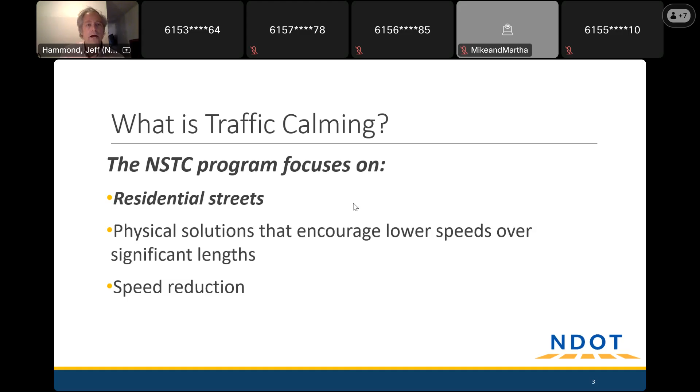Speed cushions are our number one tool. Probably most people are familiar with those, we'll talk more about those. Those are the types of things we use because we find them to be the most effective, and we are focused on speed reduction. We're not trying to shift traffic to one street or another, we're just trying to get it to stay where it is and slow down and drive more appropriately through your neighborhood.

We know that putting things on the road, the engineering side, is not the only way to go about this. Education is a big component, and enforcement is huge. We all wish, most people on these calls anyway, wish that we had more ability to have MNPD out, park a cruiser, and write tickets. That would be a big help to maybe curbing some of the speeding activity. Unfortunately, as you all probably know, there is a limitation for Metro Police Department to do that, so they're doing a lot of other important work out there.

So one of the reasons we do this program, and NDOT has put such an emphasis on slower speeds, is just because of the safety implications. This graphic speaks to that in the very unfortunate situation that there is a pedestrian-vehicle collision. We know that the chance of survivability is way up as speeds are slower. But that, along with just being a quality of life issue, we hear it practically every meeting. Neighbors say, I can't go for a walk along the street.

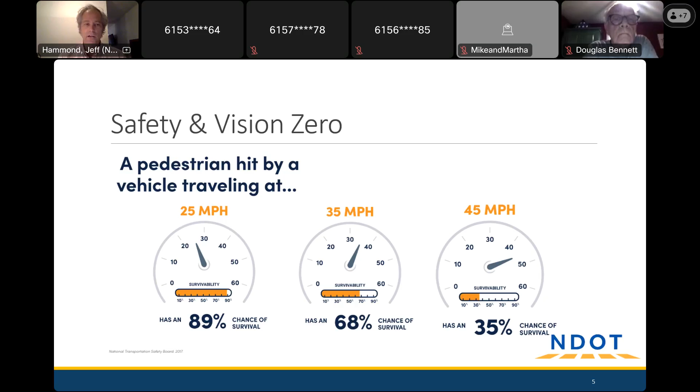I can't do a lot of things. I may not even feel comfortable going out to my mailbox and checking the mail because speeding can be such an issue at times. And so, that's why I think this program has been such a popular one.

This slide speaks to that. Right now in our program, we have over 600 streets just like Hicks that people have asked the city to look into the speeding situation. We open this application window up twice a year. You all applied into that. I'm not sure exactly when - in some cases these are a couple of years old - but neighbors on Hicks have applied into this program.

At that point, we go out and do a lot of data collection. I'll show you some of that. We pick the top 25 streets that have a demonstrated speeding issue, and Hicks, unfortunately or fortunately, is one of those. I mean, I guess if you feel like there is a speeding issue, then you're glad that we're here offering this project to you.

We like to share this just so that you know you're not the only ones experiencing these issues. This is a countywide situation. In practically every neighborhood in Nashville, there are people who complain about the speeding activity.

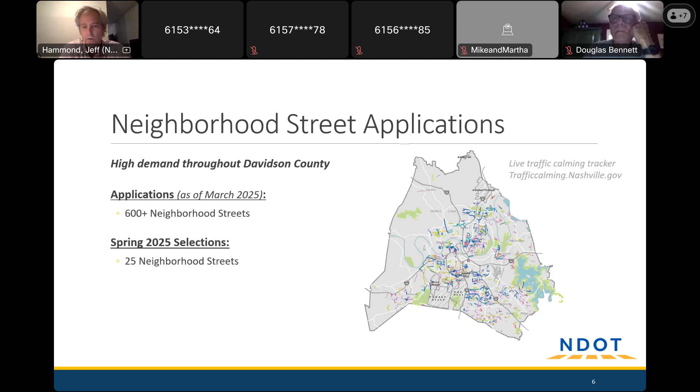At this point, we also like to remind you about Hub Nashville. If you're not familiar with it, it's a tremendous resource for those of us in Davidson County. You can call 311 and talk to someone, or you can go to hub.Nashville.gov. It's a great clearinghouse for all things metro government, not just NDOT or transportation, but practically every other department is represented there. We say that here because there are sometimes things that we cannot handle in the traffic calming program. A common request we get is for stop signs.

We don't do that as part of this program. Another common request we get is sidewalks, and if we just had sidewalks, the speeding might not feel as intense. Unfortunately, sidewalks are not part of our toolbox in this program either, but those are the types of things that you can go to Hub Nashville and put in that online request, and then a member of Metro staff will follow up with you on that.

of the scoring that we use are things that are probably pretty apparent - the amount of traffic on the road and the speed at which that traffic is driving. And then the other 30% have to do with more of those vulnerable users. Are there sidewalks on the street, for instance? Or is it on a transit route or close to it? And then are there things that someone may want to walk to? Are there libraries in the area, or a park, or a school? All of those types of things are taken into consideration when we pick which projects are going to move forward with a potential traffic calming solution.

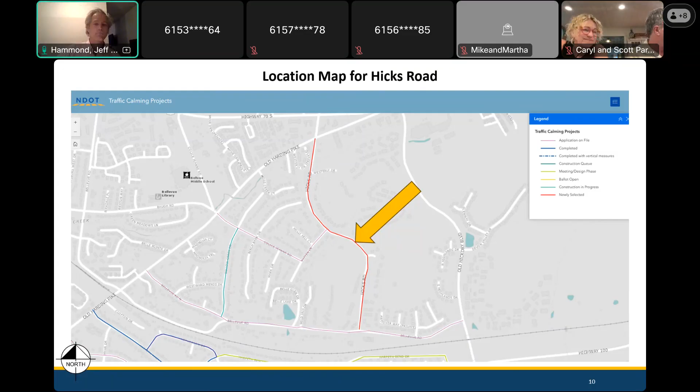Let's talk about some of the tools that we might think about. The first one we've already mentioned, the speed cushions. This is really the bread and butter of our program. It has become that way anyway, and I'm sure you all have encountered these on some of the streets around town. We've been using these now for about 5 years regularly, this style of speed cushion.

We might use 2, 3, or in some cases more speed cushions across the width of the road. The main idea is that we don't want anybody to be able to drive around them. Now, in your case on Hicks, I think 1 speed cushion in each lane is more than adequate. The edge condition is not such, in most cases, that someone's going to drive around.

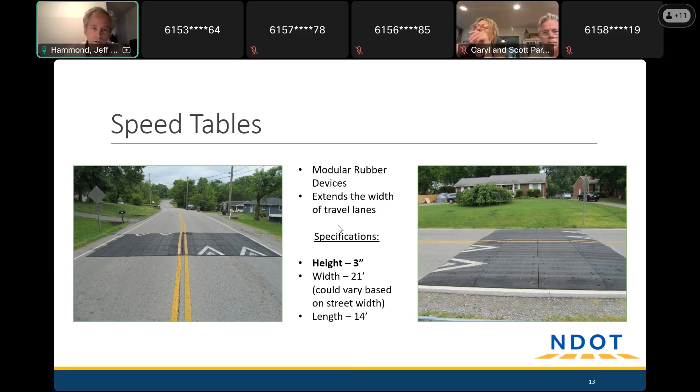We do have some before and after data. I always caution looking at this. It really depends on the street and on the configuration and how fast traffic was going before and all of that kind of stuff. But we are seeing, on average, a 9 or 12 mile an hour reduction when we put a speed cushion on the street. So most people will just tell you, you can just tell it slows traffic down.

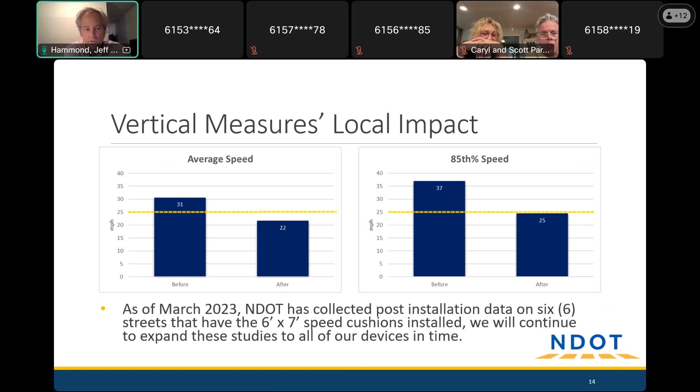Another tool that we have is not as impactful in terms of maybe the objections to it, but also some people might say it doesn't have as great an effect on speed either. But that is the radar feedback sign. This falls into that information category we were talking about earlier. Sometimes just giving a driver some feedback about how fast they are really going can help communicate that message that you really need to slow down. And so we will use these at times.

In some cases, like if the traffic volume is over 5,000 cars a day, we do not use raised cushions for a road like that. Or if the street is too steep, too windy, or has too many driveways, if we can't put in speed cushions or circles, we might use a radar feedback sign instead.

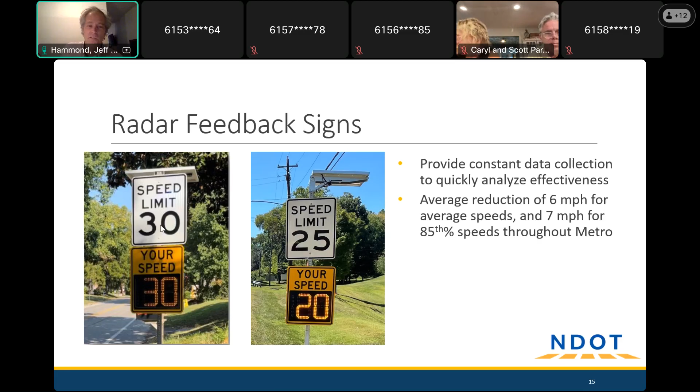Some people swear by radar feedback signs and say it's made a wonderful difference on their street. Others say it helped at first, but the newness wore off, and they're not sure it still works. So we're still collecting before and after data about the longevity of that benefit.

Another tool is pavement markings, whether we introduce new pavement markings on a street that didn't have them, or just refresh existing ones. The idea is that a very wide street, or one that appears wide, can encourage faster speeds. So if we add markings that visually narrow the street or the lanes, that can have a positive impact, and we do that occasionally.

We have to be careful putting in something like a center line, though, because sometimes that communicates that it's a more major street than it actually is, and we don't want to falsely encourage people to go faster. Pavement markings are in the program.

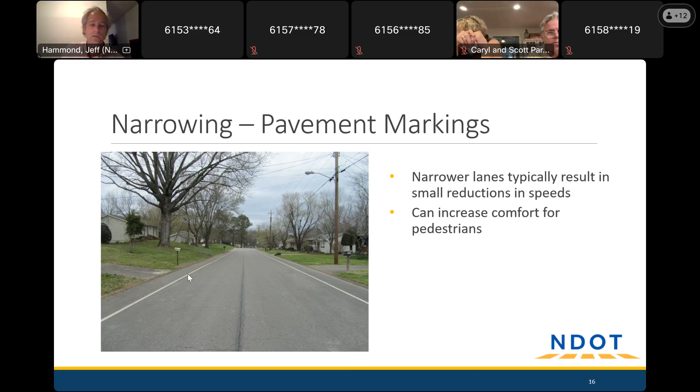A specialized use of pavement markings is bulb outs. This is more of an urban treatment, usually where you have a lot more pedestrians and curb and gutter. But occasionally, if we have a wide, sweeping intersection with high speeds turning onto or off of a street, we'll try to visually and sometimes physically reduce the width of that intersection by extending the curb inward a little, making people slow down as they make those turns.

I don't think we have that option here. I don't think your streets are wide enough, and really you only have the one intersection on the street. But anyway, just something to keep in mind.

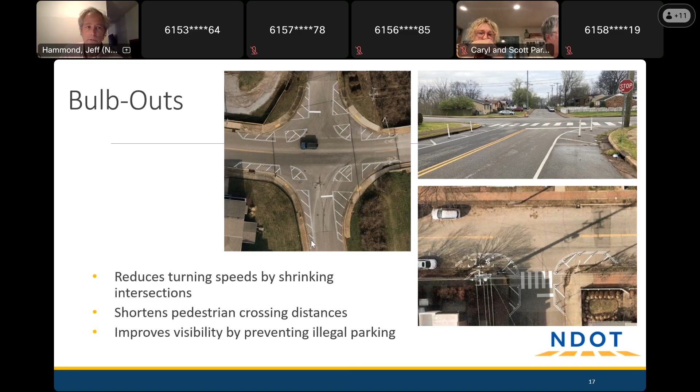Chicanes are an even more specialized treatment, usually in an urban area, that introduce an artificial meandering of traffic. They work okay if you've got enough width for some parking, and those parked cars become part of the treatment. There are a couple of these in Davidson County, not very many.

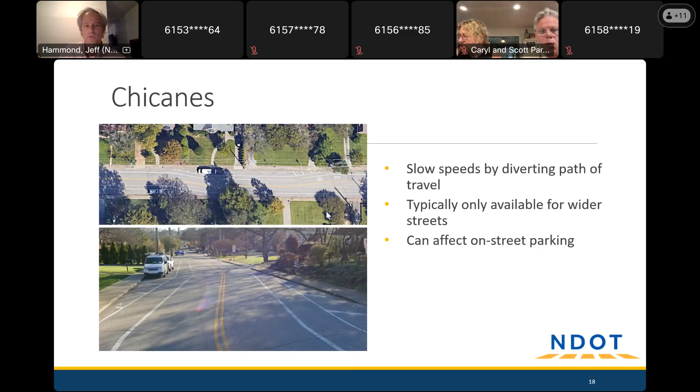The last tool is traffic circles, and we've had a kind of start-and-stop relationship with them. Metro has put in a few of these and then stopped in the past few years as we watch how they perform. They can have unintended consequences — things like school buses and large vehicles with a very long wheelbase can have trouble navigating these.

You really need a very large intersection for them to work, to cut down on the available width on these really big intersections. Again, I'm not sure it would fit here on Hicks.

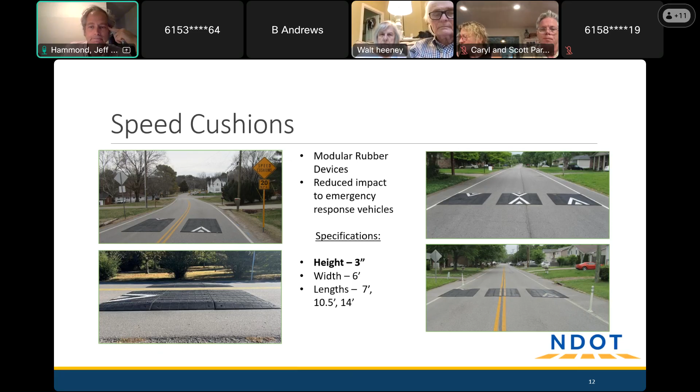Is there another time for questions? Go ahead.

Thank you, I'm sorry I didn't see a hand raised—Yolanda Coxway. I wanted to know, in the beginning at the Old Harding and Hicks intersection, there's an area that for whatever reason will not stay level, it has a dip. I wanted to know if you all will treat that or better prepare that area before you lay down the speed bumps.

Agreed, I agree with her. Okay, yeah, I was not aware of that. That's great to know.

It's kind of like an inverse speed cushion. Yeah, like we have one built in. We'll look at that, I will mention that. Now, from a speed cushion installation standpoint, if it's right at the intersection, we won't be very close to it. Our first speed cushion won't be for at least about 300 feet, probably a little more. We don't like to put speed cushions or any traffic calming right at an intersection. In that case, we've got an all-way stop there, so we don't want traffic backing up or cars sitting on it. That's good, I'm sorry, it's not at the intersection.

It's towards that intersection, past the townhomes there. So once you pass that entrance, you'll see it. It's hard to miss it. They've tried to repair it, but for whatever reason, the dip comes back. Interesting, absolutely, I'll take a look at that and put a flag out to our project managers at NDOT. At all costs, we will avoid it if it's that obvious when we're out there looking at it. We won't spot something to go right there on it. But beyond that, let me put that into the roadway manager there and see what the status is, if they have anything in works. I'm sure the district guys are aware of it, I don't know if they have anything in the works to try and treat that.

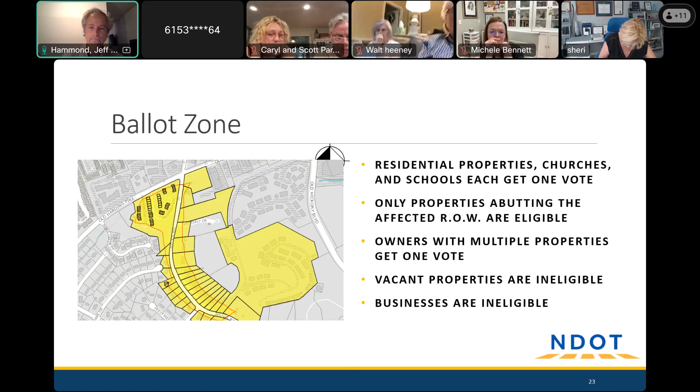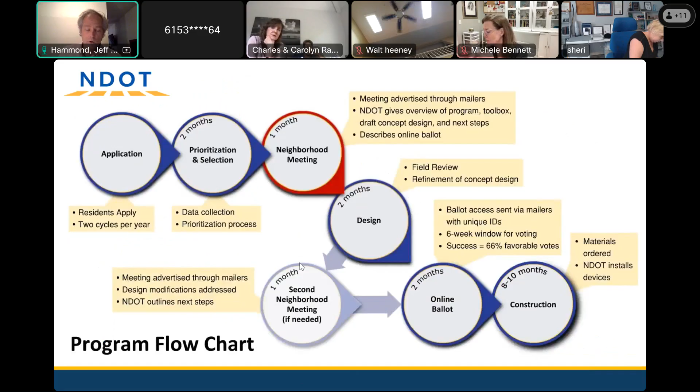I have a question - is there flexibility in the plan you're proposing as far as where the speed cushions are positioned? Can there be fewer speed cushions, or are you still considering the radar signs, or are you pretty much going towards these speed cushions? Well, that's a little bit up to you all. What we'd typically say is if we're going to do speed cushions, we need them regularly enough that we have an impactful project. If we just go out and put two sets, maybe one at the beginning and one at the end, we don't really feel like we've accomplished very much. But can we lengthen that a little bit? Maybe. I probably wouldn't recommend going too much further apart, but right now we're kind of at the outer limit at 600 feet. If we looked at reducing one and spreading them out a little bit, I don't think it would totally destroy the intent of the project.

So it's a little bit of an art more than a science at this point. Yes, we can look at speed feedback signs, but typically we'd do that if we're not using a cushion. We don't usually use both, because we know that if we put a cushion in, we'll get slower speeds, and we don't necessarily need to tell people they're going 20, 25, or 30 miles an hour. We're trying to slow down those much faster vehicles. But well, there are specific...

I was just going to ask if you have a specific location you think we ought to avoid, or an issue or something like that. Well, there are certain areas that may have blind driveways or coming around a corner where you want people to slow down. Then there are areas where people naturally slow down because of the incline or the curve — you don't necessarily need it there. So you kind of have to look at the road and how it's traveled, where people speed up and where people can't see. I know coming out of our driveway at Devon Woods North, you're coming around the corner and people take it so fast. It's just a matter of time before you have an accident. And you have deer crossing. So there are specific parts of this road where you do want people to slow down.